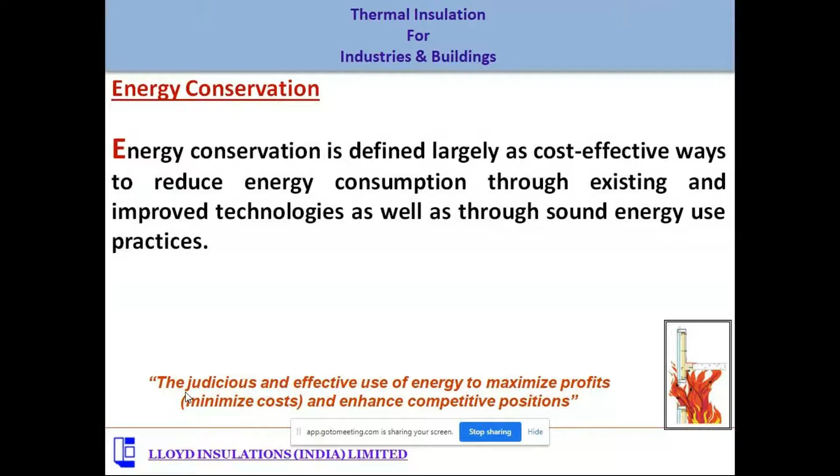In this presentation, you will understand the basic working principle of thermal insulation, how it acts as a barrier for energy conservation and energy transfer, and what applications and materials are available in the market. What are the good materials suitable for industries? I will discuss these things from a practical implication point of view. It will be a little bit theoretical, but mostly focused on the application part.

It has been observed that thermal insulation is one of the cheapest and easiest methods of energy conservation for any heating or cooling arrangement. This is a very simple, very cheap material, and with it we can get very efficient, energy efficient management through implementation of thermal insulation material.

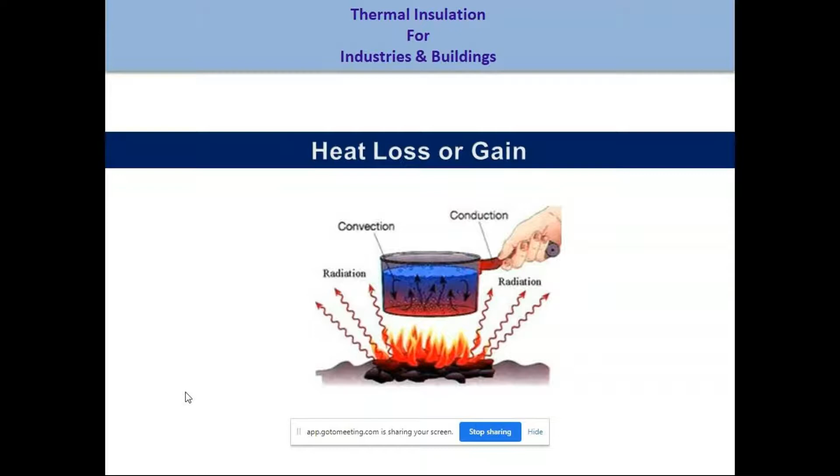The simple basic heat transfer methods are there, which everybody has studied in school, probably 10th or 11th standard. Heat loss or heat gain depends on three different kinds of heat transformation: convection, radiation, and conduction. These three methods take place when there is a difference in temperature between two surfaces or two mediums, where heat transfer takes place from the hotter to the colder object. That's a very simple and common thing everybody knows.

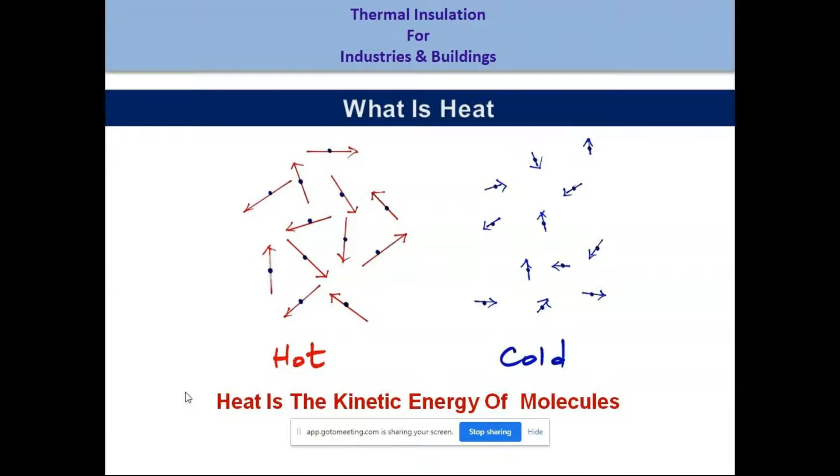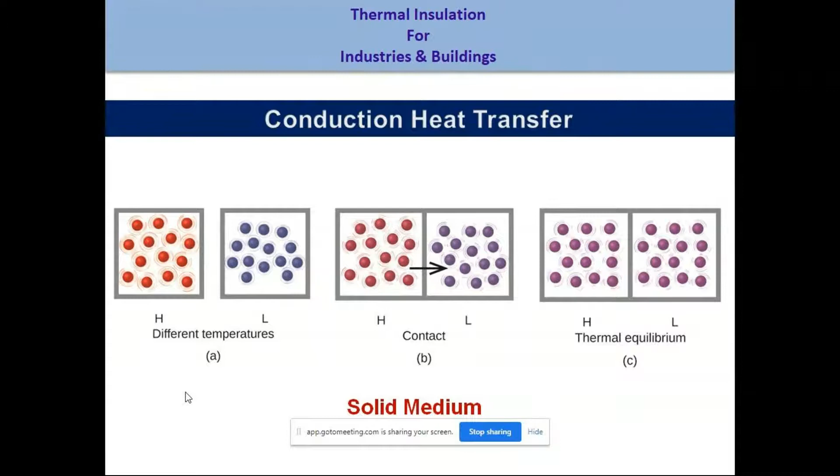In the case of conduction, there has to be contact between two surfaces, with a solid medium involved. When we talk about conduction heat transfer, there will be two solid mediums in contact, one with higher temperature and one with comparatively lower temperature. Heat will transfer from one solid body to another by conduction, and after a certain transformation of heat, it will come to equilibrium, meaning both bodies will reach the same temperature. That is called conduction heat transfer.

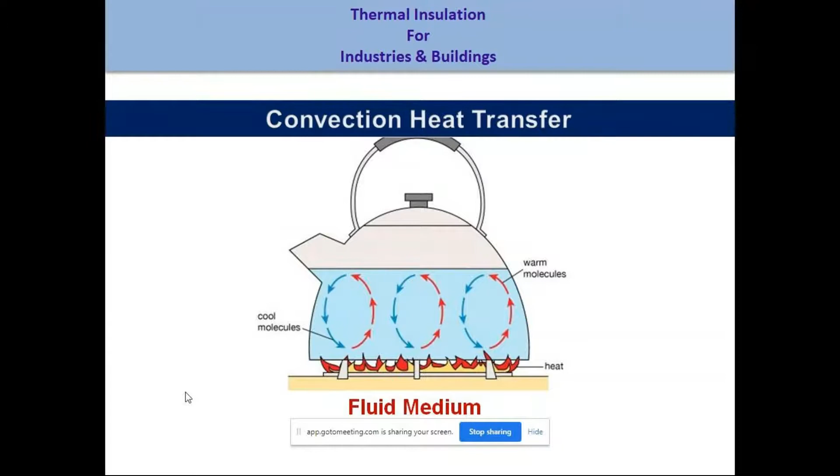Then there is convection heat transfer. For convection, we need a fluid medium—it may be air or any liquid. Within a liquid or fluid material, convection of heat takes place in a circular motion, or from bottom to top, something like that. It happens in air and in any fluid medium. That is called the convection heat transfer system.

Then there is radiation heat transfer—a kind of heat transfer that doesn't require any medium. There should not be any fluid or solid medium; without any medium, when heat transfers, we call that radiation heat transfer. For example, when we get solar heat, there's no medium between Earth and Sun, but the solar radiation still comes to Earth. That is called radiation heat transfer. So heat transfer can happen in these three different forms. But when we talk about radiation heat transfer, we need to understand a bit more about it.

What is radiation heat transfer actually? Radiation heat is basically transferred in the infrared spectrum, which is part of the electromagnetic wave spectrum. There is a small portion called the visible light spectrum, which the human eye can sense, starting from violet to red. Beyond violet there is ultraviolet, which we cannot sense, and beyond red there is infrared, which the human eye also cannot sense. The heat transfer takes place in this infrared region, which is not detectable by the naked eye.

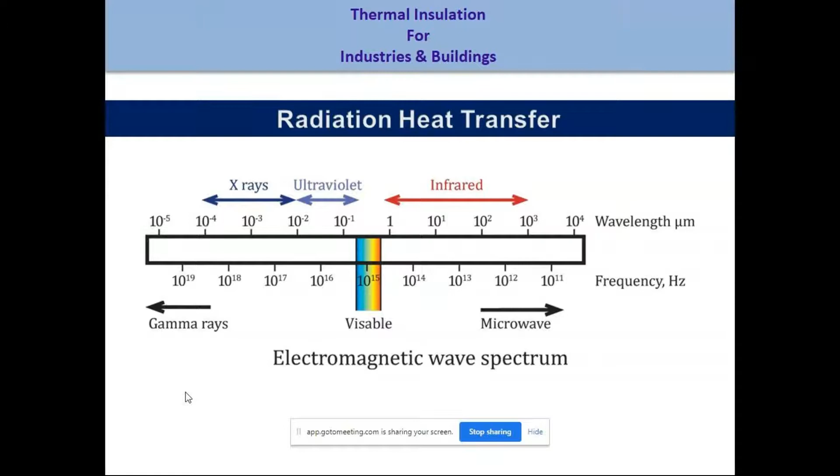For that, we need a kind of sensing camera, or infrared temperature sensors, which are now very common and popular. Everybody can see there is a lot of thermal scanning happening at airports and in every office and everywhere—security persons using a camera or a temperature gun to measure the temperature of a patient or any human being.

This is a very good tool for us to estimate or find out any difficulties or faults in any equipment or measuring system, like building insulation or industrial applications like boiler leakage or pipeline leakage. Everything can be detected by using these infrared cameras.

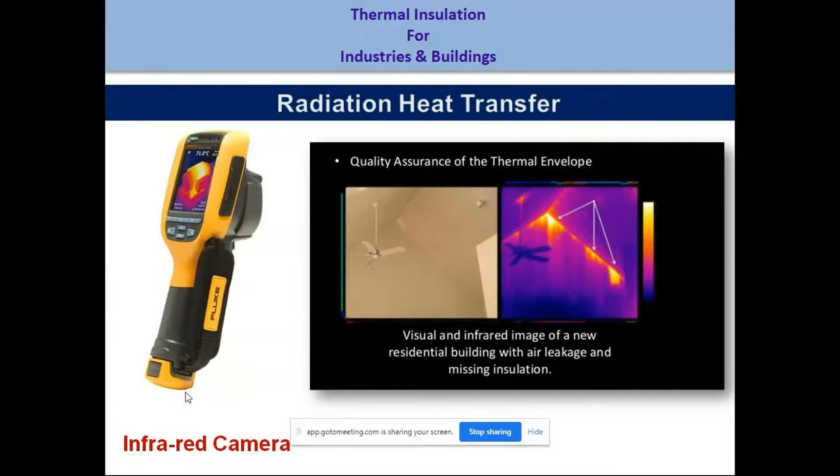The same technology is used for night vision cameras. When we talk about night vision cameras, that camera senses the temperature differences of the object or any human being. So even in pitch dark, when there is no light, a night vision camera still works, because it doesn't sense any light—it senses only the temperature gradients or temperature differences in the environment. So these infrared cameras are a very common tool for measuring the temperature of an object.

Right? Now the simple thing is, what are the basic formulas or calculation methods of heat transfer?

K is the thermal conductivity of the barrier. This is the most important characteristic or property of any thermal insulation material. Based on the K value, the performance of any insulation material should be judged. So whenever we select any product for insulation purpose, the basic requirement is to take care of the thermal conductivity value, because based on that we can calculate what thickness is required to achieve a certain level of heat loss or heat transfer.

So K value is the thermal conductivity value, measured in kcal, or it can be in watt per meter Kelvin. There are different kinds of units for K value or thermal conductivity value.

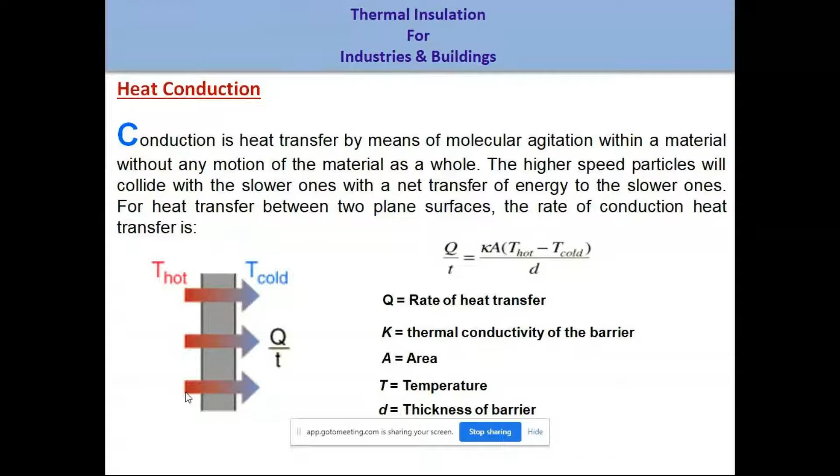In this formula, we have only considered the conduction heat loss. K value is basically for a solid medium, the thermal insulation material, and whatever heat gets transferred through that insulation is conduction heat transfer. But as we know, there are two other forms: radiation and convection. We were not considering those two factors in the previous formula. Now we are going to implicate these two factors again. So what will be the final formula?

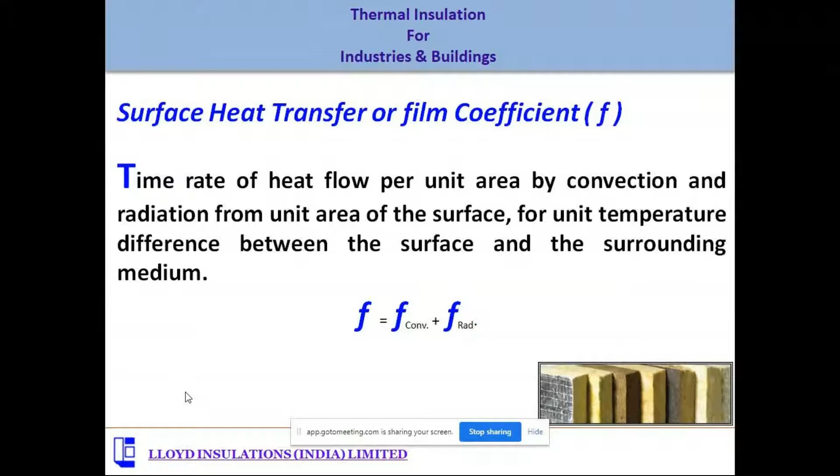Let me explain this. If we consider there is heat at the bottom, that means there is a hot surface or hot body. Over that we put insulation, and above the insulation there is a cladding or covering. Every insulation material should be covered with some sort of solid or protective material, called the insulation cladding. I will explain what cladding materials are available later.

Whenever heat from the hot body transfers to the insulation material, that's conduction heat loss. The quantity of heat coming out through the insulation exists because insulation doesn't mean we are 100% protecting against heat transfer. There is always some heat transfer depending on the thermal K value or thermal conductivity of the insulation material, so some heat will come out through the insulation at the top, at the cladding material covering the insulation.

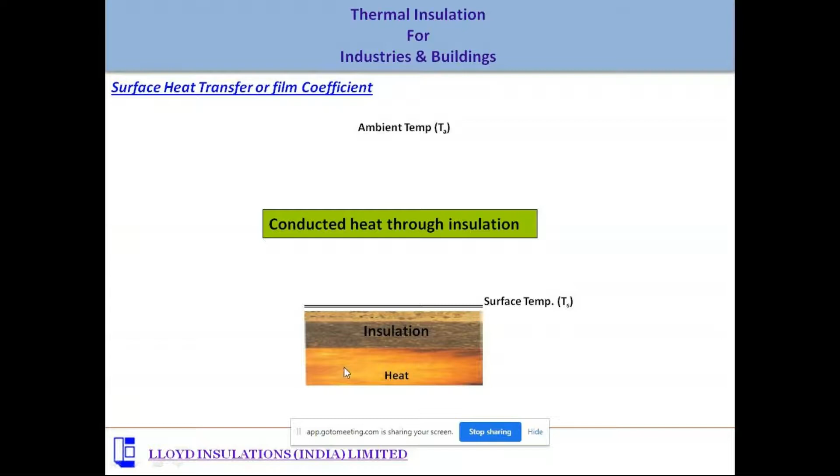From the insulation surface, heat loss actually happens through radiation heat loss and convective heat loss. On the surface of the cladding material, due to wind velocity, convection heat loss occurs. From the surface, due to wind, some heat dissipates into the environment - that is the loss. The quantity of heat dissipated into the environment because of wind velocity is the same quantity that will again come from the hot body to the surface of the insulation.

Similarly, there will be some heat loss due to the radiation effect on the surface of the cladding material. There, the surface emissivity factor refers to the texture or glossiness of the surface. The glossier the surface, the less the radiation heat loss. So you'll notice that whenever there is insulation, there is a covering material called glossy aluminum sheet. We always try to use glossy materials on the insulation surface to reduce the emissivity factor so that radiation heat loss is reduced.

We wrap food items with aluminum foil just to keep them warm longer, because the aluminum foil has a glossy surface, and since it's glossy, its emissivity is very low, so it radiates less heat into the environment. So the product remains hot for a longer time. That is the idea of using a glossy surface on the insulation.

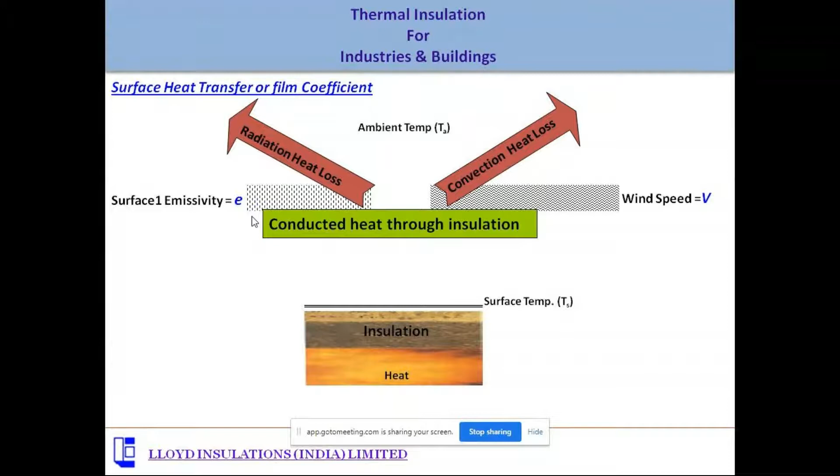I am referring you to the IS factors - this is the formula. Now you can see the final heat transfer coefficient considers F, which includes the radiation factor and the velocity of wind factor. There is an E factor, the emissivity value of the particular cladding material, and V for the wind velocity, considering the ambient wind condition. The other factors, like 4.876 times 10 to the power minus 8, are all constant figures derived from actual experimental data. These have been formulated to calculate the heat loss, based on experimental data from which these constant figures came.

They have given us guidelines, like for bright aluminum sheet, what should be the factor of emissivity, and for GI sheet, what will be the emissivity factor. In cases where people use cement plaster as a cladding material over the insulation, these are the factors, and you can see the brighter the surface, the lesser the heat loss. What per meter square Kelvin is the heat loss from the surface, or the heat transfer coefficient from the surface - the brighter aluminum has the lesser value of heat transfer coefficient, meaning it will allow less heat to transfer from the hot body to the ambient.

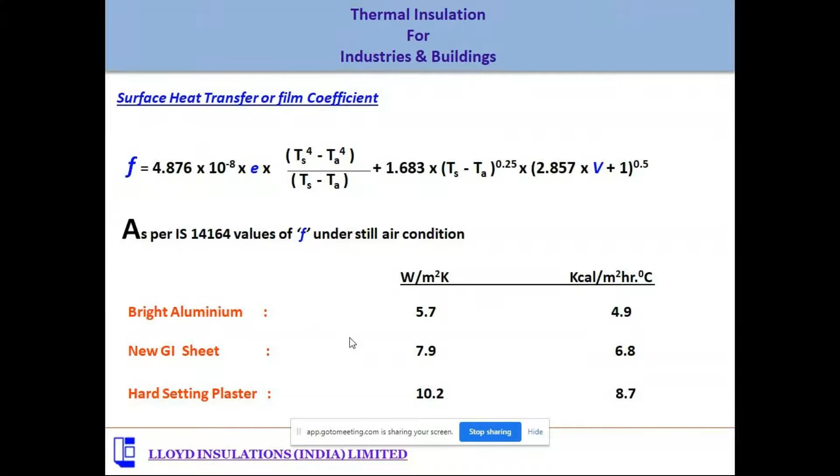There is another important thing - this is the film coefficient calculation method. What are the factors and formulas we use for the film coefficient or surface heat transfer coefficient calculation? This is the modified formula of heat transfer, considering the F factor, or surface heat transfer coefficient factor. Here we are putting the F value to calculate the actual heat transfer coefficient.

Now there is an interesting thing, that for a flat surface we are using one formula, and for a cylindrical or pipe surface we are using a different formula, where there is a logarithmic factor involved.

The reason behind this is, whenever we are putting insulation on a flat surface, as I told earlier, the heat loss or heat gain is directly proportional to the surface area of the insulation. So in case of a flat surface, if we consider 1 square meter of flat surface and put insulation on top, the exposed surface area is also 1 square meter.

But in case of a pipe, if we consider the surface area for a particular diameter pipe, once we put insulation on top with a thickness of say 100mm, the overall surface area of the insulation material will be much higher compared to the bare pipe surface area. So to compensate for that, this logarithmic factor has to be implicated in the formula. That's why there are two different formulas - one for flat surface and one for cylindrical surface - when we calculate for any particular system.

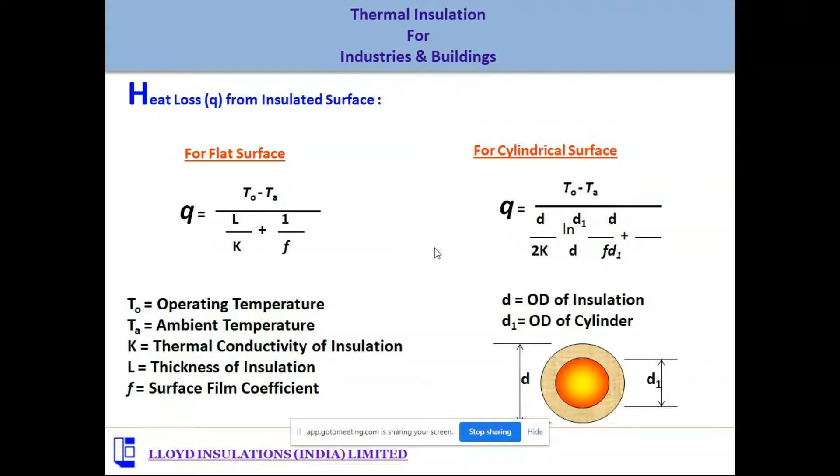Now a very common question comes to us - what should be the economic thickness of insulation? If we keep on increasing the insulation thickness, it is obvious, a very common assumption, that at a certain point there will be no heat loss. The more the thickness of insulation, the lesser the heat loss or heat gain. So if we keep on increasing, at one point there should be a certain condition where there is no heat loss, and everybody will try to adopt that thickness to minimize the heat loss and financial losses.

But it is not that - actually what happens, I'm telling you. Whenever we increase the thickness of insulation, we are increasing the surface area as well. In case of a flat surface also, when we consider the insulation surface, there is also the periphery surface. If I use a 1 square meter insulation of 50mm thick, then that 50mm thick surface area is also there, from where heat loss will also take place. So if I keep on increasing the thickness, that area also increases.

So this graph will nicely explain what should be the optimum thickness for any heat loss or heat gain calculation. If we see the insulation thickness in the x direction as increasing, and y as the heat loss quantity, then when we increase the insulation thickness, this red line shows the cost of heat loss. As I'm increasing the insulation thickness, the cost of heat loss is drastically reducing, but after a certain point, even if I keep increasing the thickness, you can see this red line...

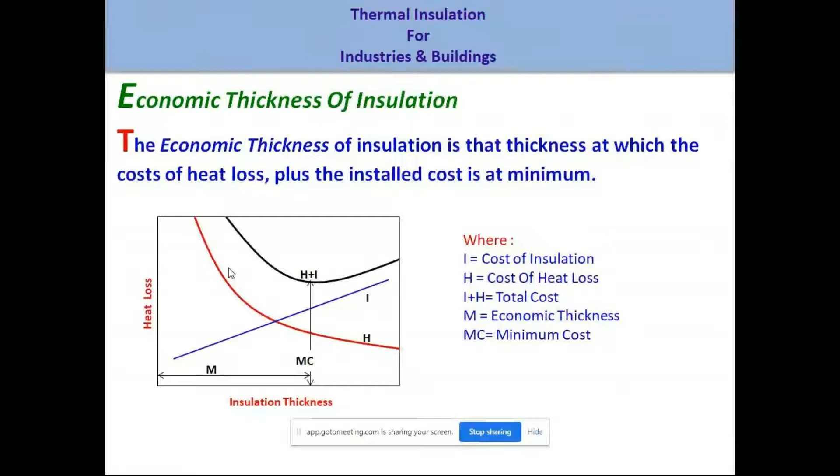Then another factor comes in: insulation material selection. There are different kinds of insulation materials available in the market. While selecting the insulation material, what should be the deciding factors? Since different materials have different properties, what are the basic important properties we have to be careful about when selecting insulation material?

First of all, whether those materials follow any particular standard, whether it's an Indian standard, American standard, or British standard, because these standards are very stringent in designing the material properties. So when any insulation material conforms to a particular standard, that gives a quality certificate. This is the basic, foremost criteria for selecting any insulation material.

Then the operating temperature range - whether that particular material or insulation is suitable for the temperature where I'm going to use it. For example, if I'm using a material at 1000 degrees centigrade but its withstand temperature is only up to 500 degrees centigrade, it will not perform well at that temperature. So we have to be careful that the operating temperature of the system and the withstand temperature of the insulation material are checked.

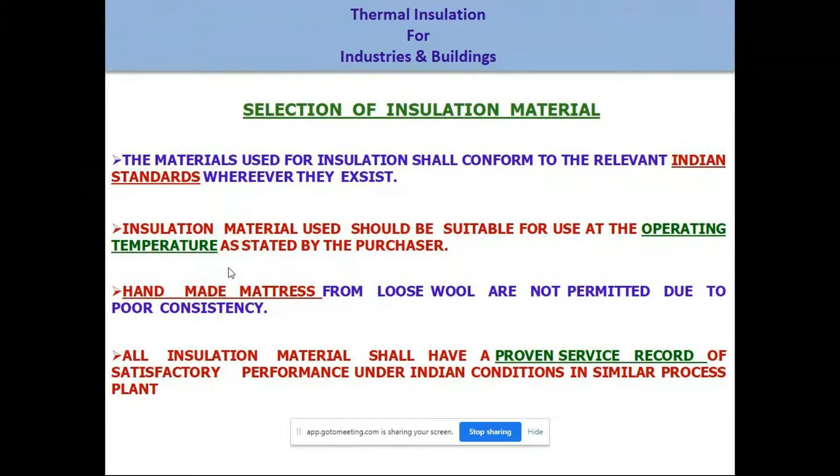Then other important factors are like water repellent grade, because whenever we use an insulation material on a pipe or metal surface, if the material is not water repellent or waterproof grade, and it absorbs moisture or water, it will corrode the base material, I mean corrode the pipe or metal surface. So we have to be careful about selecting material that is water repellent or water resistant grade.

Whether it is corrosion resistant is also important, because in big industries like power plants and refineries, there are huge pipelines or boiler areas. If those materials get corroded, there will be huge loss, and there may even be accidents due to leakage of steam and similar issues. So corrosion resistant materials are very important.

Then comes whether it is fireproof or non-combustible type material. When we talk about combustibility, there is a combustible test method. For example, if we burn a paper, that paper will start flaming. Now, if you put that paper in a container and allow the fume to come out through a particular hole...

When the paper is burning, there will be some fume, and that fume will come out from the container at the top. If we try to put a fire to that fume and it gets ignited, that means it is a combustible material. But if the fume doesn't get fired, that is a non-combustible material. So non-combustible and non-ignition are two different things.

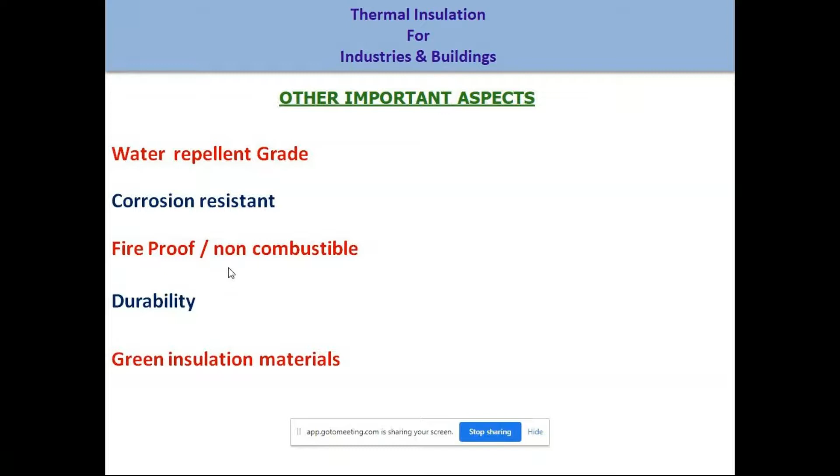But now IGBC or GRIHA, these green building rating systems, actually recommend the products which are green products or not. There are green certifications from GRIHA for different kinds of insulation materials. So there are different types of insulation materials available in the market. I will go through the basic and most common insulation materials available, which are widely used, so that you can understand the facts required for this insulation system.

This is the most common and widely used insulation material, the cheapest insulation material. Throughout the world, this material is being used. That is known as rock wool insulation. Rock wool, as the word suggests, is made out of rock. It's called basaltic rock or volcanic rock.

From the volcanic rock, by melting the volcanic rocks at around 1800 degrees centigrade, from the molten rocks we get fibers. We get very thin fibers out of that rock, and bonding those fibers with some sort of resin called phenol formaldehyde resin, used as a binder to bind the rock fibers, we get a different form. You can see this picture.

So this is basically a slab form. This is a slab form thermal insulation product, and it can withstand up to 750 degrees centigrade continuous exposure. So wherever there is a system, maybe a boiler or steam line, this is the most common and the only product available in the world for widely applied things.

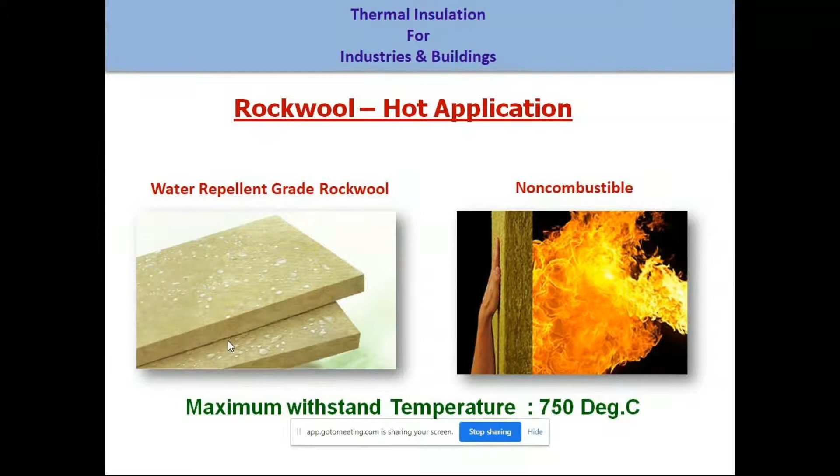There are other products for high temperature applications beyond 750 degrees centigrade. This rock wool insulation comes in different forms, like this one for pipe insulation - preformed pipe insulations are there, so it can be readily applied on the pipe.

They are in the mattress form also. This rigid slab is actually used for any flat surfaces. And if there is any curved surface, then this kind of mattress or roll form insulation is used. So this is basically used for hot insulation up to 700 degrees centigrade, or it can go up to 800 degrees centigrade also. For hot applications, we use these rock wool insulations, and widely for all steam lines and boilers, these insulation materials are used.

Beyond 800 degrees centigrade, within 800 to 1425 degrees centigrade maximum, there is another product called ceramic fiber. The ceramic fiber is made out of aluminum oxide - not silicate, aluminum oxide. Silicate is a little bit mixed in there. Al2O3 is the basic material. So same thing - out of that Al2O3, from the molten aluminum oxide, we extract fibers, and then with a suitable binder, we make it into a different format.

You can see there is a slab form, again the mattress form. So there are different kinds of forms available for ceramic fiber. These are mostly used for furnace lining, wherever there is temperature more than 1000 degrees centigrade, varying between 1000 to 1400 degrees centigrade. Within this temperature range, this ceramic fiber insulation is the most used insulation.

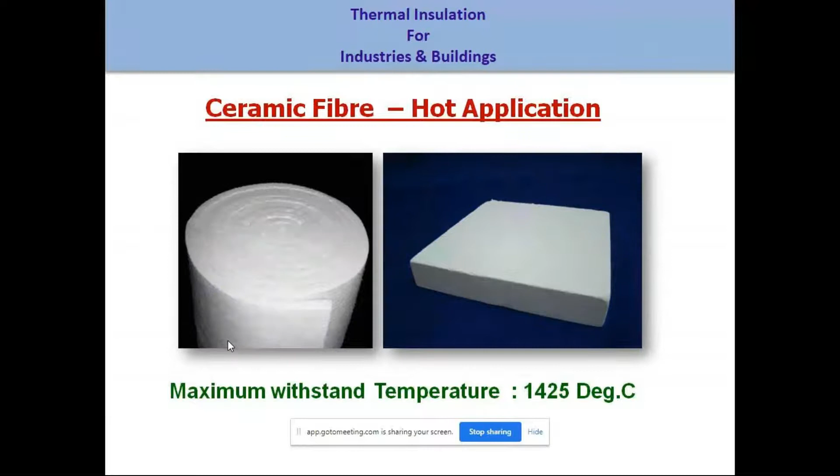It comes in different forms, and you can see again there is a module form, a paper form, a thick sheet form. So there are different forms for different kinds of modules, like with blankets or with slabs in different layers.

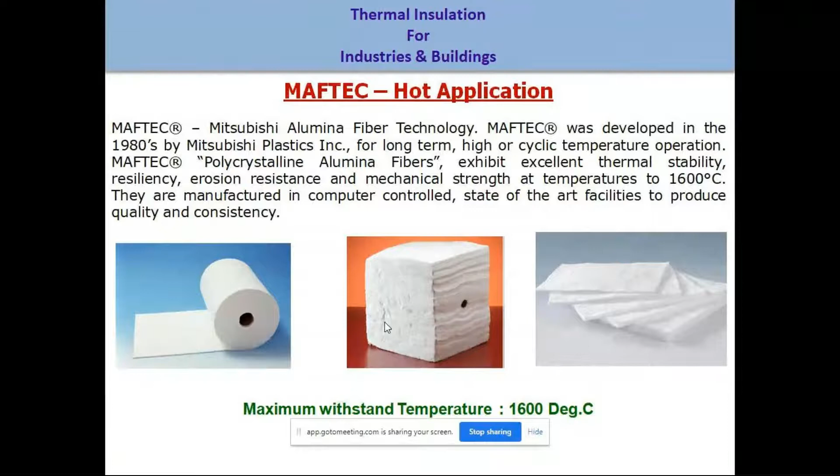In case of say 1400 degrees centigrade temperature, the thickness of insulation or ceramic fiber goes around 300 millimeter or maybe beyond that. So with that, we manufacture this kind of 300 mm ceramic blocks to use inside the furnace lining.

I'm just showing some pictures of ceramic fiber lining inside a furnace. These are all gas-fired furnaces. You can see at the bottom there are some holes. From these holes, gas-fired burners are there, and the fire comes inside these holes.

The insulation material maintains the temperature inside, and the outside surface temperature should not go beyond 60 degrees centigrade, even when the inside temperature is more than 1400 degrees centigrade. The outside of the insulation or boiler casing maintains around 60 degrees centigrade, because more than that is not allowed from a personal protection point of view — beyond 60 degrees centigrade our skin may get damaged. The guideline says any heated object surface temperature should not be more than 60 degrees centigrade, so the thickness has to be designed such that the outside surface temperature of the insulation stays below that.

So these are some applications I'm showing you for furnace lining with ceramic fiber type of insulation application.

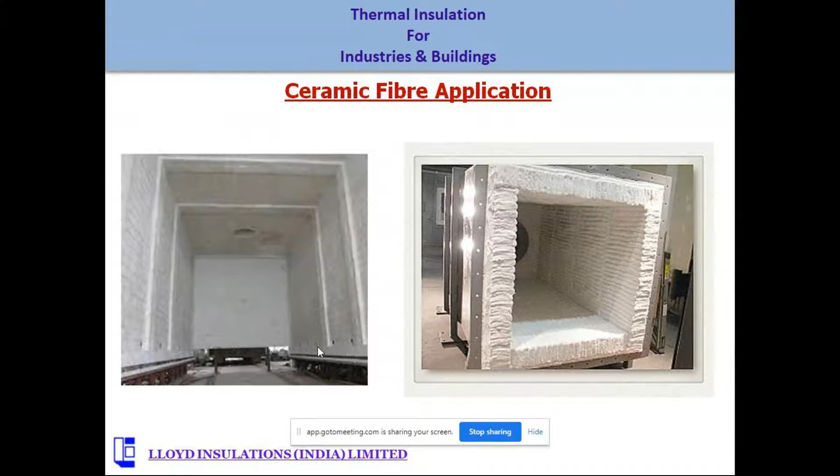Whenever we consider cold applications, there are always chances of condensation. Whenever we use cold water or ice in a glass or any container, you will find condensation on the outer surface. The same thing happens when we use insulation on any cold application.

It may be chilled water pipelines or cryogenic lines where the temperature goes down to minus 200 degrees centigrade. There, if insulation is not proper, chances of water or moisture condensation on the surface are very common. If we use fibrous material there, it is almost certain the moisture or condensed water will percolate inside the insulation and reach the insulated surface, corroding the metal pipe or surface.

So to avoid that, there is a main insulation material called PUF, polyurethane foam insulation.

I will show you how polyurethane foam actually forms. It becomes foam when two component liquids come in contact with air and start foaming — that's why it's known as foam, polyurethane foam. Polyol and isocyanate are the two chemicals; when combined in presence of air, they start foaming. That's how the manufacturing process of this PUF insulation is done.

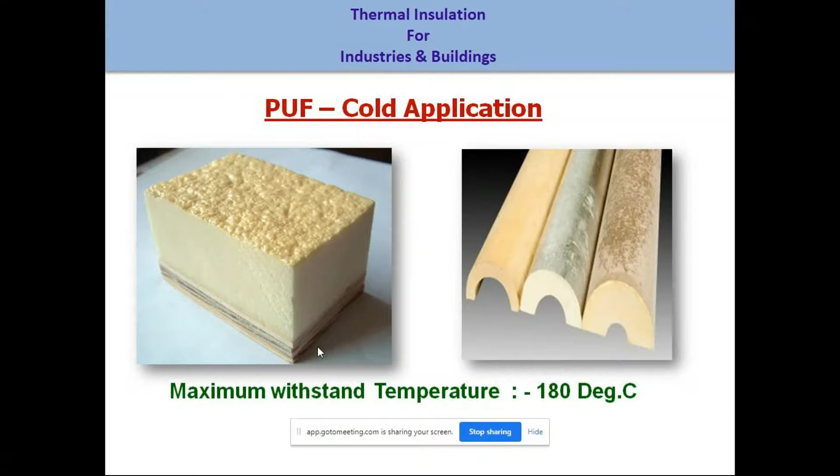To avoid any chances of water ingress through the insulation material, we always prefer to add a vapor barrier or moisture barrier between the insulation and the cladding material. Every insulation material has to be covered with a cladding or covering material to protect it from mechanical damage. As I said, a brighter sheet has a lesser emissivity factor, so we always prefer a bright aluminum sheet as the cladding material for insulation products. That is why we use aluminum sheet.

In case of cold insulation, we add an additional layer of vapor barrier — it may be a rubberized sheet or aluminum foil, which acts as a very good vapor barrier. This ensures that if any moisture forms on the surface of the cladding material, it will not reach the insulation surface. To avoid that, we always use a vapor barrier in cold applications.

This is the latest insulation product developed, not so popular till date because of high cost. This is known as microporous insulation, having a wide range of operating temperatures from minus 200 degrees centigrade to 1000 degrees centigrade. So whenever we discuss different products for different temperatures, like rock wool, ceramic wool, PUF, microporous insulation can act in a wide range of temperatures. At the same time, the thermal conductivity value is almost one-tenth compared to ceramic fiber, rock wool, or PUF insulation. So it is a very high efficient insulation product. If I need 100 mm thickness of rock wool for any insulation system, microporous will require only 10 mm thickness. So you can understand the impact of the insulation.

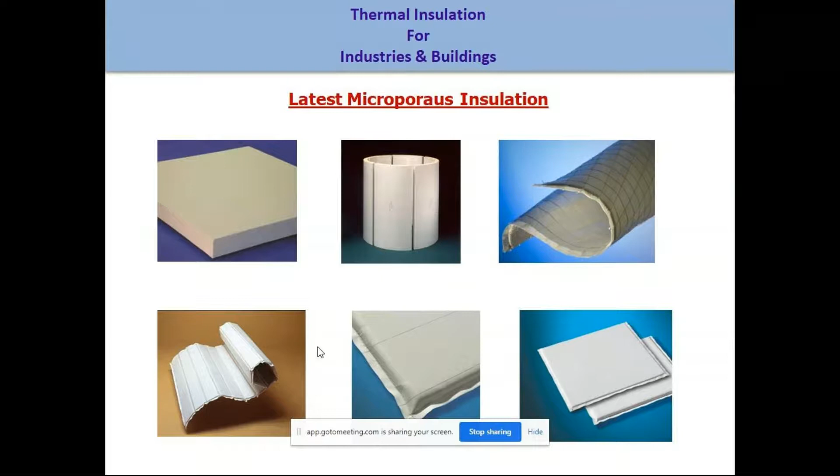Thank you. So this microporous insulation may be a future insulation because of its very low conductivity value and flexibility in terms of wide range of temperature applications. So in future, probably this will be the ideal product for any kind of insulation. Presently, there is no manufacturer in India, but we're importing this product from Germany. So this is a very efficient product, but hopefully the cost will come down in time.

As well, the cladding material is also very important for any insulation material, because the life of insulation material depends on the cladding or covering material. The most popular cladding material is aluminum sheet. The reason behind this is its glossiness is good compared to GI materials, though GI is comparatively less costly than aluminum sheet. But from the heat loss point of view and longevity point of view, aluminum sheet is the most popular cladding material for any kind of insulation system. If you visit any refinery, petrochemical or power plant, you will find huge pipelines with insulation, and all the pipelines are covered with aluminum sheets. So this is the most common cladding material for insulation.

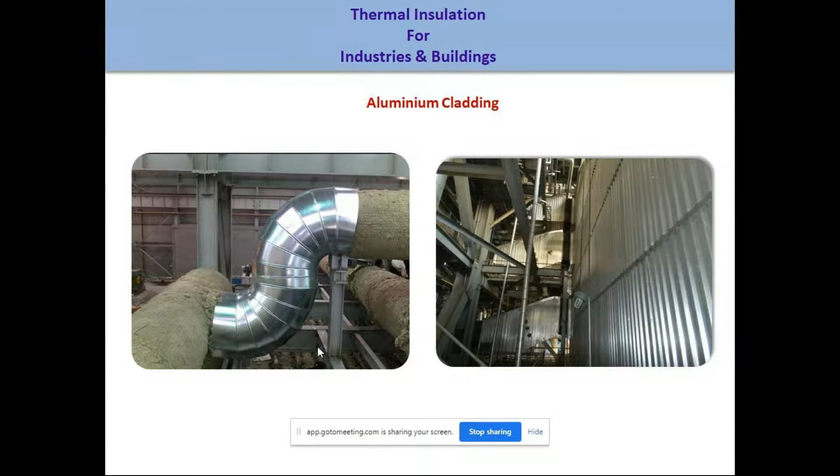There are different kinds of color-coated sheets. GI sheets are also coming into the picture because of their aesthetics as well as strength. In case of aluminum, the problem is the mechanical strength is not much compared to GI sheets, but the life of aluminum sheet is much better in terms of corrosion. If we use color-coated GI sheets, that will add a stronger sheet compared to aluminum sheet, and because of its color coating, it will give extended life compared to normal GI sheet. But we are compromising the emissivity factor, so there will be some extra heat loss from that. So there is an economics of using this kind of sheet where it is required.

This is mostly in cases where the pipelines are at ground level, where there are chances of foot traffic. In many industries, people used to walk on the pipelines because maybe there are 2-3 pipelines going together. One pipeline is a plain water pipeline where it needs to be painted regularly, so people step on the insulated pipe and walk to paint the uninsulated pipe. The chances of damage are there. In those cases, aluminum sheet will not be suitable because it cannot take human foot traffic load. So it's better to go for GI color-coated sheet in that particular case.

There are some cases where the pipeline goes below the trench, through the trench or below the earth surface. There, neither aluminum sheet nor color-coated sheet will work. There we use HDPE cladding, high-density polyethylene sheets, which are good cladding material for underground piping. In many plants, you have seen chilled water pipelines for HVAC systems are underground pipelines, where normal insulated sheet with aluminum sheet will not work. So there, these HDPE cladding sheets are used. These are a totally waterproof system. In case of aluminum or GI sheet, there will be overlaps, joints, screw fixing, so chances of water seepage will always be there. But these HDPE sheets are hot welded - once I wrap the insulation, we just use a blowtorch to seal the joints, giving a 100% waterproof sealing system to ensure there is no water ingress into the insulation.

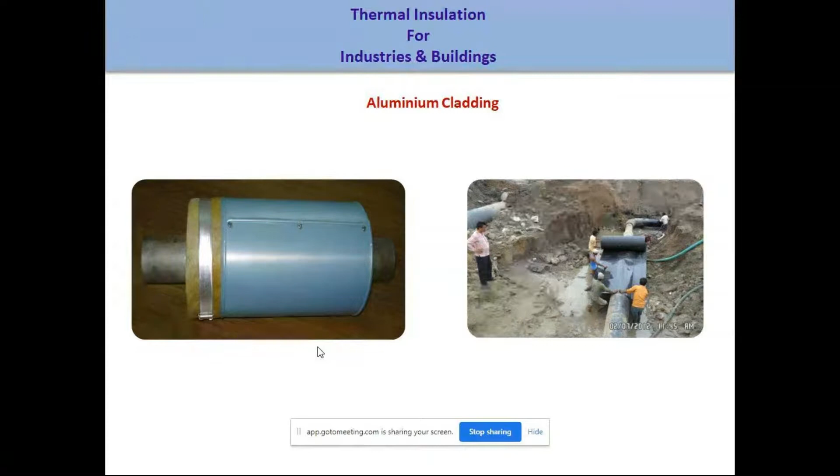So for underground pipelines, there are these HDPE cladding sheets.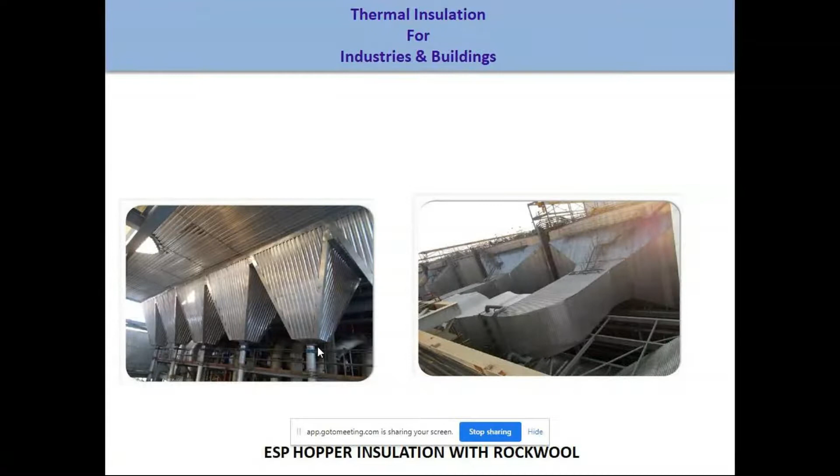In industrial applications, if you visit any plant wherever there is some sort of heating instrument, like a furnace or a boiler, particularly in a refinery, you will find boilers, furnaces, and heaters. Insulation is everywhere there, and all over the insulation you will find this kind of aluminum sheets. Those who are not aware about insulation will not understand what is actually inside that material. But in power plants, refineries, and petrochemicals, there is massive use of thermal insulation.

These are some pictures you'll see. I was just showing the people who are working. You can see they're using a heat shield while working on the live lines. These pipelines are almost always operating.

Operating at around 540 or 550 degrees centigrade in case of a power plant, the superheated steam temperature goes up to 540 degrees Celsius. So at this temperature, in a running plant when we are working, people wear this kind of protection shield to work on the live lines. In many cases, when maintenance work goes on, they cannot take a shutdown for the plant, so we have to work on live lines. That is a very difficult job for installation work at that high elevated temperature.

So there are some preformed, tailor-made insulation systems for valves and flanges. In any pipeline system, the valves and flanges are kept open, with no insulation formed. This is a very common practice in any industry.

So to minimize heat loss, because in a big plant, if there are say 100 such valves, the quantity of heat loss from those valves or flanges is quite high, tailor-made systems have been developed to minimize the heat loss from open valves.

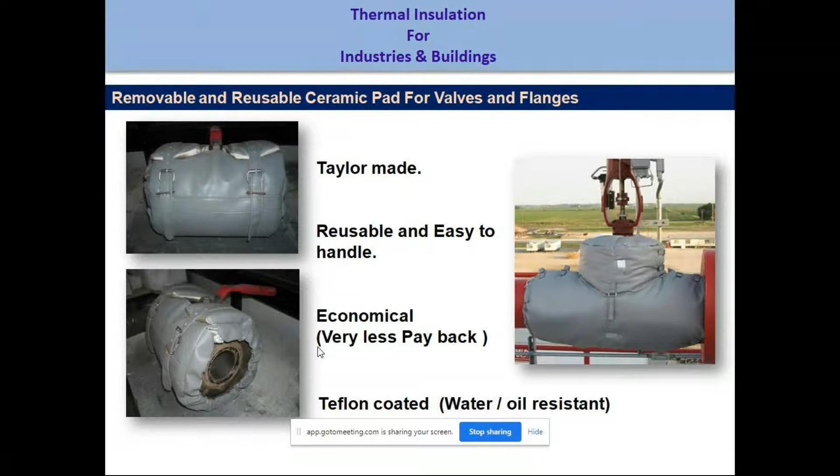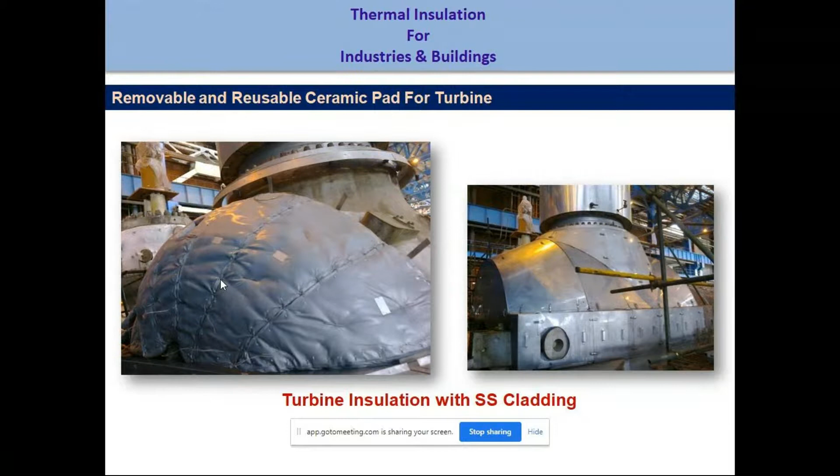But now developments are taking place. Pre-insulated slabs or pre-insulated pads are nicely stitched over the surface, and can follow the surface of the turbine properly. So these are the developments now taking place in different industries, so that the ease of application is becoming more and more, compared to the previous type of applications.

These panels are made out of puff or PIR. PIR is a superior quality of puff. Polyurethane foam is more commonly known as puff material, which is not fire safe in that way. So there is a small change in chemical known as PIR, polyisocyanurate foam, which has better fire performance. So in building applications, when we are using HVAC ducts, we should not be allowed to use any material which is a fire hazard.

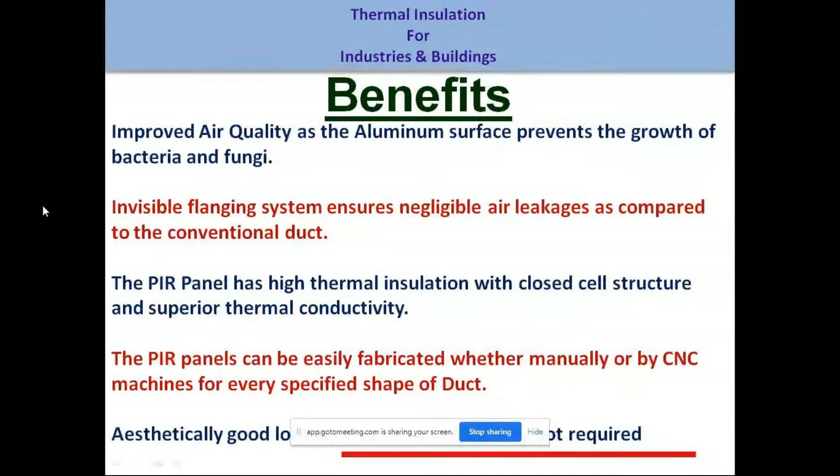And of course, the aesthetic part of these ducts is quite good compared to the conventional GI duct system. You can see the finishing of the ducts is very neat, and it can be an exposed ducting system so that you don't require any false ceiling to hide the ducts. So since the ducting aesthetic is good, people now use these ducts as an open duct system instead of going for any false ceiling.

That again reduces the cost of the system, and it is so lightweight that you don't need extra workers or labor to put the ducts on the building surface. So the advantages compared to the conventional system are quite high.

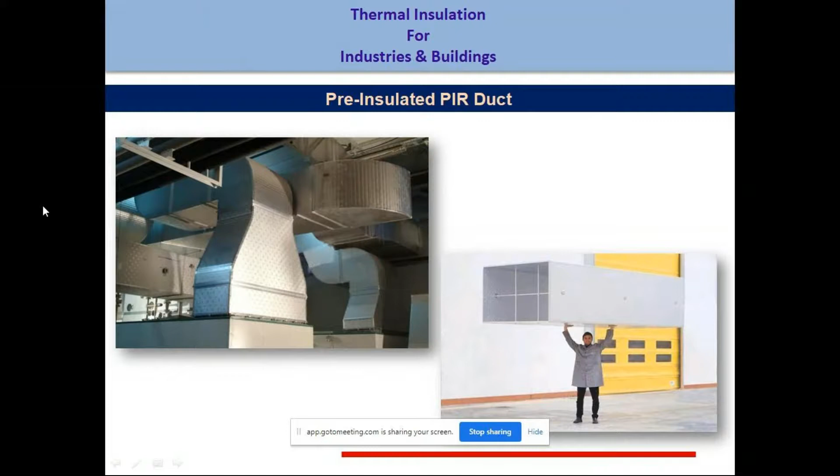So these were mostly talking about the industrial sector, but obviously in the building sector also. Now I'm coming to the building applications, because nowadays building insulation is becoming popular very rapidly. In tropical countries like us, we are not as familiar with building insulation compared to cold countries.

If we follow the building codes in cold countries, it is mandatory to use insulation for buildings, because the heating arrangement needs to be very energy efficient, and without insulated buildings they cannot sustain because the heating cost will be abnormally high. So it is very common in cold countries that buildings are insulated. But here in this tropical country, this concept is not that popular.

But now a lot of guidelines are coming, because energy savings and energy conservation systems are becoming popular as electricity costs rise. So we need to adapt this insulation for buildings.

Let me share a few things. If we consider old buildings, if we see the British structures, there are a lot of such buildings in Kolkata. The wall thicknesses are quite high, the roof heights are also quite high. Because of that, even without insulation, the inside temperature is quite comfortable compared to present day constructed buildings, right?

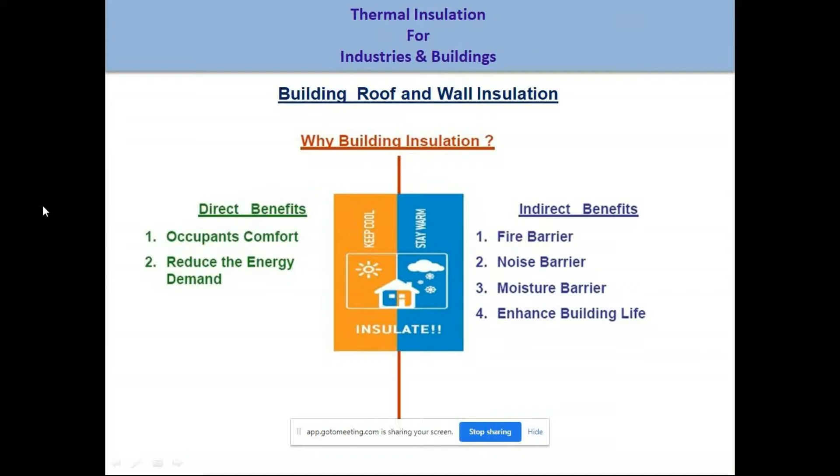In case of building insulation, it is not only helping us in the hot days, saving our electricity bill from air conditioning, but in the winter also it is helping us in a different way.

Like the solar radiation, if you can see in the summer, the path of the sun is such that it goes almost from the vertical portion of the top of the building or top of our head, so the direct solar radiation comes on the rooftop. But similarly, in the winter, the solar radiation or the solar incidence is coming at a certain angle. If you have noticed, the solar radiation in the winter comes through our windows, because the orientation of the sun is such that the angle of incidence is quite less. So the solar radiation actually comes through our windows, and it gets heated inside the building.

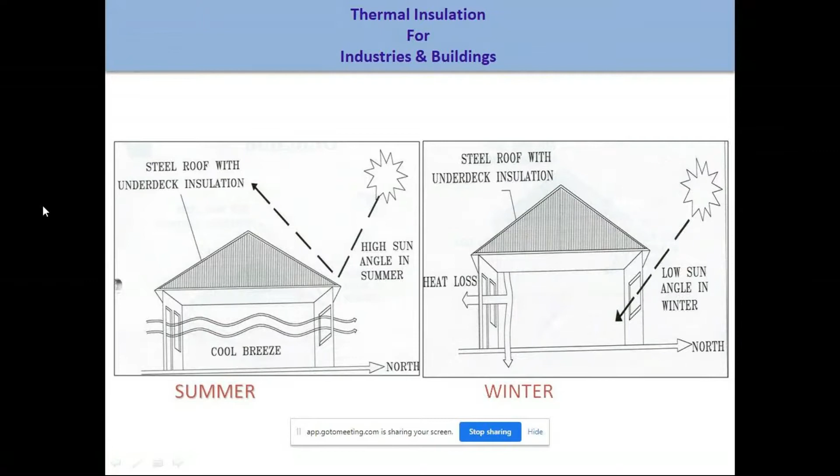So because in winter, when we are getting the solar radiation inside the building, the room or inside the room is getting heated, and that heat will remain for a longer time if insulation is there. So in the winter also we are getting benefited, and at the same time, in the summer also we are getting benefited out of this insulation on the building.

So to guide us on what will be the ideal insulation system, what should be the thicknesses, etc., there has been a code generated in the year 2007 called ECBC 2007. There have been a lot of workshops and seminars organized by ISHRAE on this topic. A lot of modifications later came in this ECBC system, and the latest ECBC, I think in 2018, has been developed, and different states are modifying this code depending on their requirements.

So state-wise ECBC codes are also different. This code actually guides us on what should be done, not only insulation, there are a lot of other aspects also there, in case of glass glazings, in case of water harvesting, whatever the energy efficient building practice should be, that has been guided in this code. Insulation is one part of that.

Whenever we are going for insulated building or energy efficient building, there is now a rating system of the building also, like star rating. In case of electrical appliances, we go for a star rating system. A similar rating system is also applicable in the building sector. So to achieve a gold rated building or a platinum rated building, there's a certain number of points to achieve, out of 100, if we can achieve 90, then we can go for gold certification, something like that.

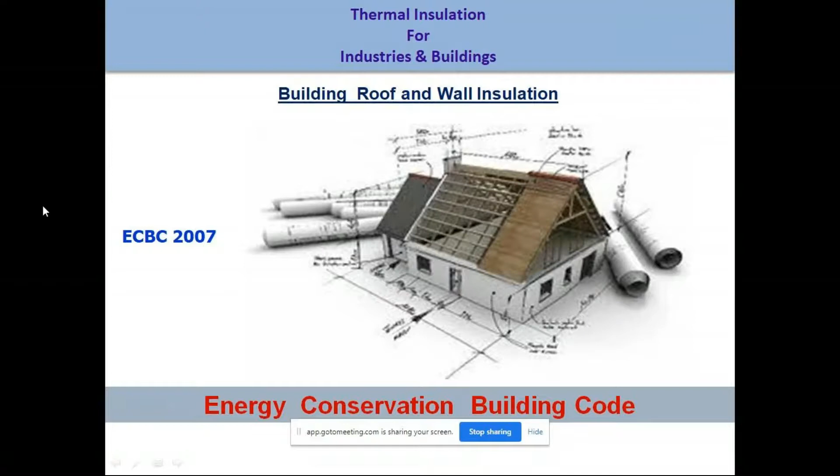There are almost 34 different points, starting from water harvesting, solar lighting system, gardening, tree plantations, thermal insulation applications. So there are different points, and based on those points, how much one building is scoring, depending on that, that building will be rated. Insulation marks are 9 points out of 100, so it carries a good amount of points if we use insulation in building construction. So whenever people think about certification of their building, insulation can carry a lot of marks to achieve a certain rating of the building.

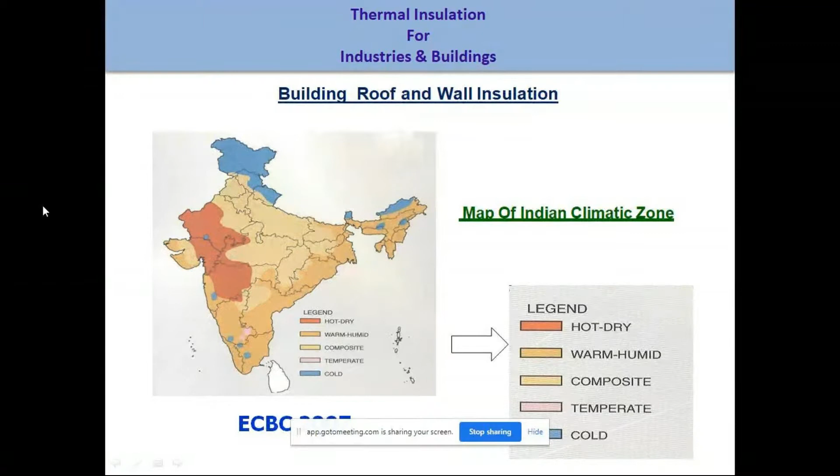This ECBC code has divided the entire country into 5 different climatic zones: hot and dry, warm and humid, composite, temperate and cold. So these 5 climatic zones cover the entire Indian contour, and based on these different climatic zones, they have guided us with different kinds of U value or R value.

I'm just telling what is the U value and R value. There are 2 kinds of buildings. One is 24-hour use building, that is hospitals, call centers, hotels. And there are some 12-hour use buildings like offices, schools, shopping malls. These kinds of buildings are considered as 12-hour use buildings.

So for 12-hour use buildings and 24-hour use buildings, ECBC has guided us for different climatic zones what should be the U value or R value of the walls and roofs. U value means thermal transmittance factor and R is thermal resistance factor. It's just the inverse. R is equal to 1 by U, or U is equal to 1 by R, whatever it is. So if we know the R value, we can calculate the U value as well.

R is L by K. L is the thickness of the insulation and K is the thermal conductivity. Whenever we talk about the thermal resistance of any particular insulation, we calculate it as L by K, thermal insulation thickness divided by the K value of that particular thermal insulation. So what is the thermal resistance we have to achieve for a particular building, for a particular composite area? That has been guided, and these figures we can get from the ECBC 2017, now it has been modified.

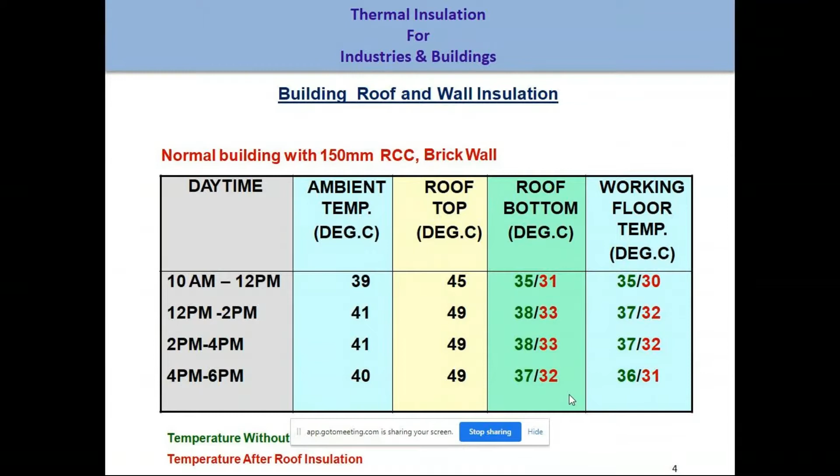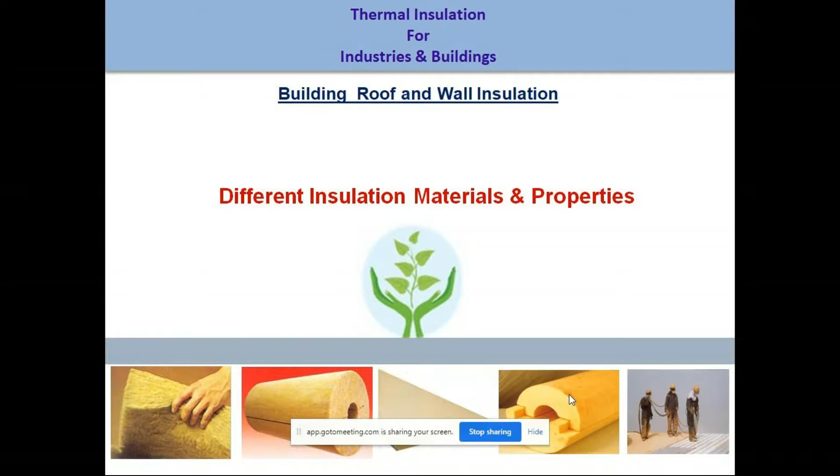There are different insulation materials, like rock wool insulation, polyurethane foam insulation, and even thermocol or EPS, expanded polystyrene. I am not covering EPS here because it is not at all a fire safe material compared to polyurethane foam or rock wool insulation. Though EPS or thermocol is much cheaper, many applicators use thermocol inside the building, but it is strongly not recommended from a fire hazard point of view. So it is always better to use a fire safe material when considering building insulation, particularly from inside the building. That is why I'm not considering EPS insulation product in this presentation.

These are some comparisons. I'm just showing you the different properties of different materials. Another important aspect is the use of the waste material of an insulation material. If the waste is hazardous for us, it will be very difficult to handle those products. So whenever we consider insulation material for a building, it should always be a safe material, for personal protection.

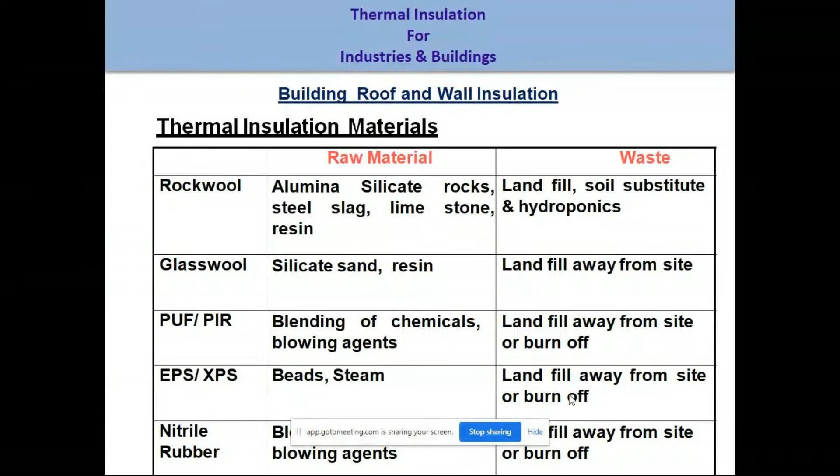Another factor comes into consideration while selecting an insulation product. There are, say, three kinds of insulation material available in the market, all equally cost-wise equal, all having good properties of thermal insulation and thermal conductivity value. Then which product should be used for a particular project to get better marks in terms of energy conservation? This is where the embodied energy concept comes in, because I have three options, three materials having equal property and equal cost, so which product should be selected? This embodied energy concept tells us that during manufacturing of those products, which product uses more energy during manufacturing. That is known as the embodied energy inside that product. So if any product uses higher energy during its manufacturing, that will get a lesser score.

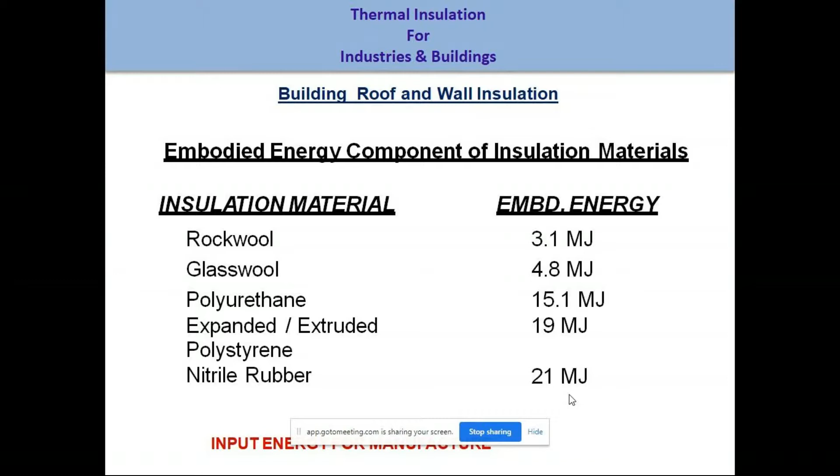You can see in this chart, rock wool's embodied energy is lesser compared to the other products: rock wool, glass wool, polyurethane foam, then expanded or extruded polystyrene, that is called thermocol, and nitrile rubber. These products are available in the market, all equally good in terms of fire hazard point of view or thermal conductivity point of view, but the embodied energy is much lesser for rock wool compared to the other products. So we always prefer to use products which have lesser embodied energy.

There are some roof insulation systems. One is called underdeck insulation, meaning when we put the insulation from the bottom of the roof, from inside the building. Another is called overdeck insulation, meaning the insulation is applied on the top of the building, on the top of the roof. These two systems are the most common applications of insulation for building roofs.

For inside applications, we always prefer to go for rock wool insulation because it is cheaper as well as the most fire safe material compared to any other product. Otherwise, PIR or polyurethane foam materials can be applied. At the same time, thermocol also can be used, and there's another product called nitrile rubber that can be used too. Compared to any other product, rock wool is the most cheap and fire safe material for underdeck insulation.

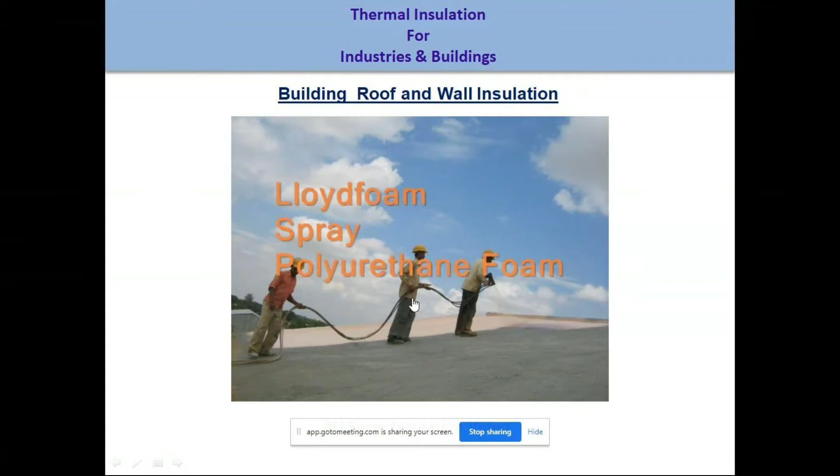For rooftop overdeck insulation, the most common and popular product is PUF spray, polyurethane foam spray applied product. There is a system called the spray applied system. Let me try to run this video, I don't know whether it will run or not. It will explain. So the PU or polyurethane foam spray system requires a machine which mixes the two components of the foam. One is polyol and another is known as isocyanate. These two chemicals come in liquid form with a certain percentage of mixing, and when they come in contact with air, they start foaming.

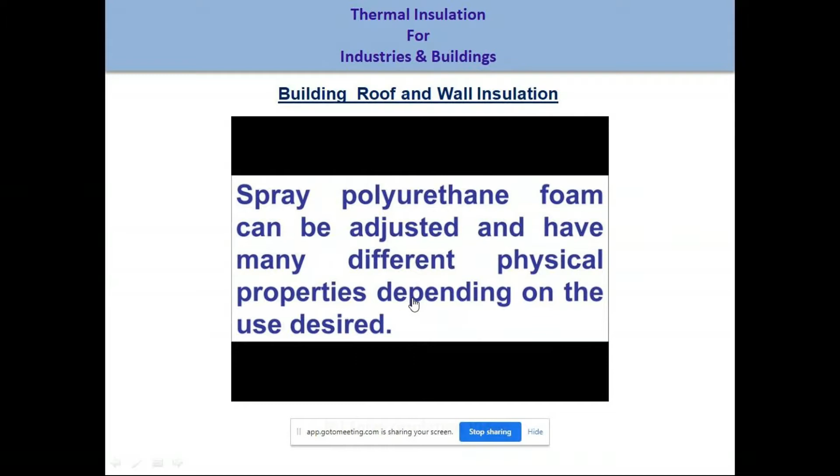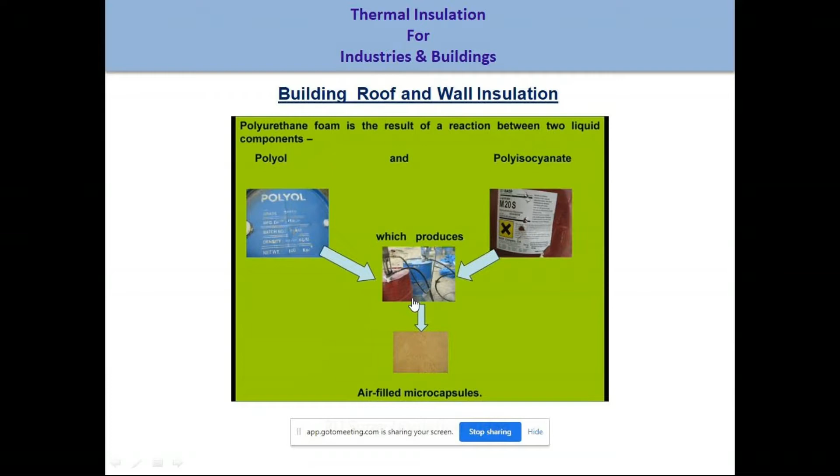It starts foaming - if I spray it, it will be like a paint sort of thing, but within a second it will come over the surface and raise the thickness of the paint to say 25mm or 30mm. So whatever the required insulation thickness is, the applicator knows how much spray is needed to achieve that thickness.

This is the spray machine. With that, these are the two chemicals - one is polyol and the other isocyanate - and there is a compressor which compresses these two liquids along with air. The compressed air and two liquids come through pipes and go up to a spray gun. These three pipes carry the liquids and compressed air to the gun, and using those three from a single nozzle at the same time...

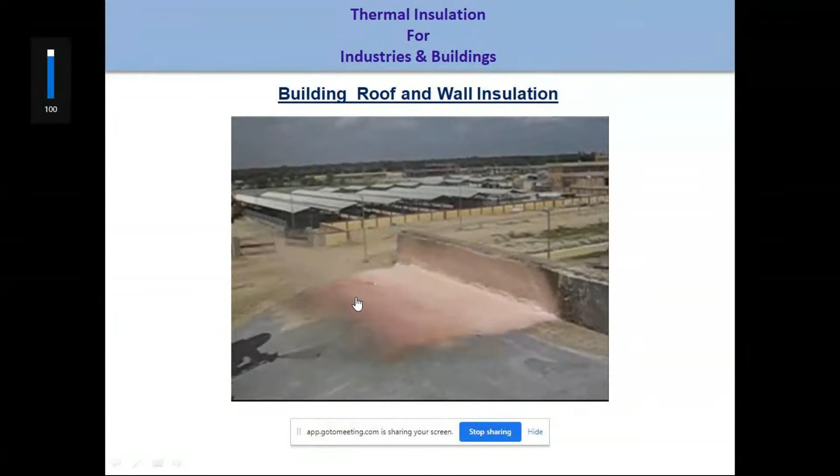Oh, sorry. So... so this was the thing.

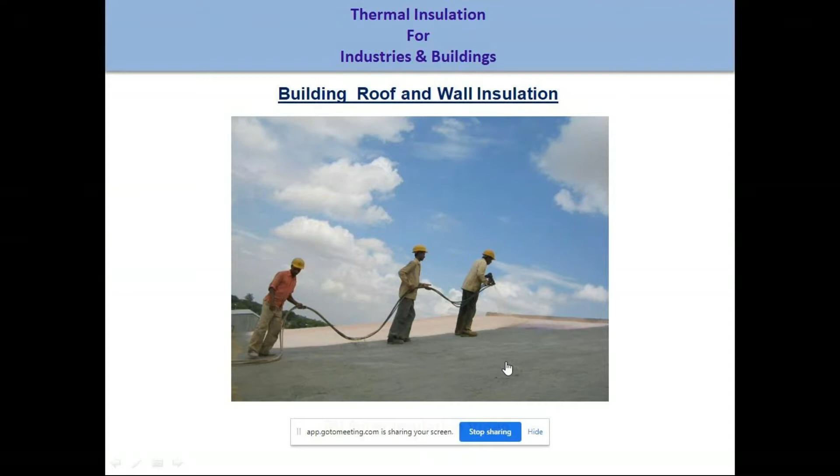This was the application of roof insulation with the PU spray system. Finally, after finishing, there will be some sort of waterproofing membrane, or there are a lot of waterproofing materials available in the market to protect the surface from water ingress. Waterproofing treatment can be done on top of that. So this is how PU spray insulation is becoming popular now for any building - commercial or residential - this is now becoming a popular system.

And then comes wall insulation as well. There are a lot of different types of wall insulation depending on the building and its requirements. The most common and popular system is the channel form system - there will be a framework, which can be GI framework or wooden framework, and in between the two surfaces there can be a brick wall, or one surface may be a gypsum board or any rigid board.

In between, there will be say 50mm to 65mm thickness, depending on the ECBC requirement. The thickness can vary depending on the location of the building. So there will be one surface, it can be brick wall, and from there inside there will be a framework, and within that frame the insulation will be put in, and that will be covered with a rigid board. This is a very common application of insulation.

Another one is known as cavity wall insulation. This cavity wall insulation has both brick wall outside and inside, and in between there will be insulation - again that can be 50mm or 60-65mm depending on the ECBC requirement. So these are the two common systems of wall insulation, and the insulation material may be polyurethane foam or rock wool insulation.

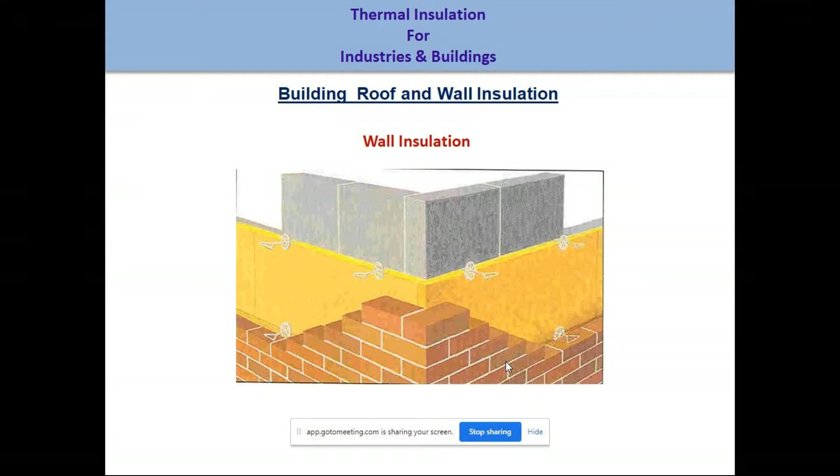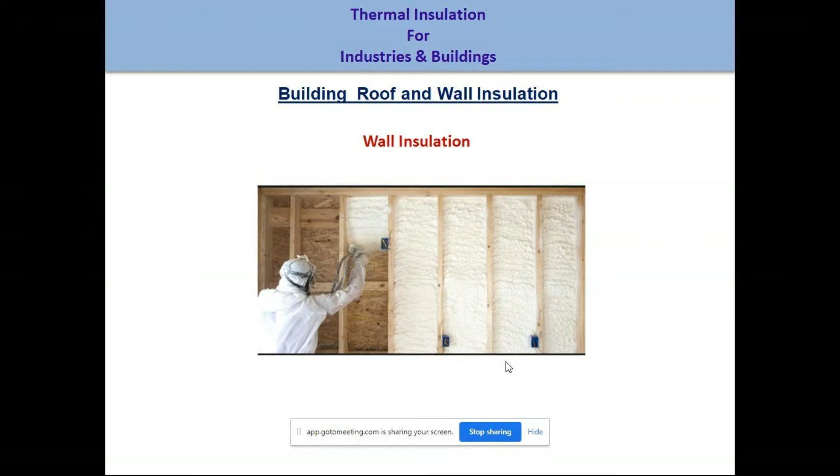And again, spray application can be done on a wall as well. As I showed this video for rooftop insulation, the same wall insulation can be done with spray polyurethane foam. So I'm just showing you this photograph of wall insulation with PU spray. There's a small video also, I'll try to show that. Just a second, if I can run this video.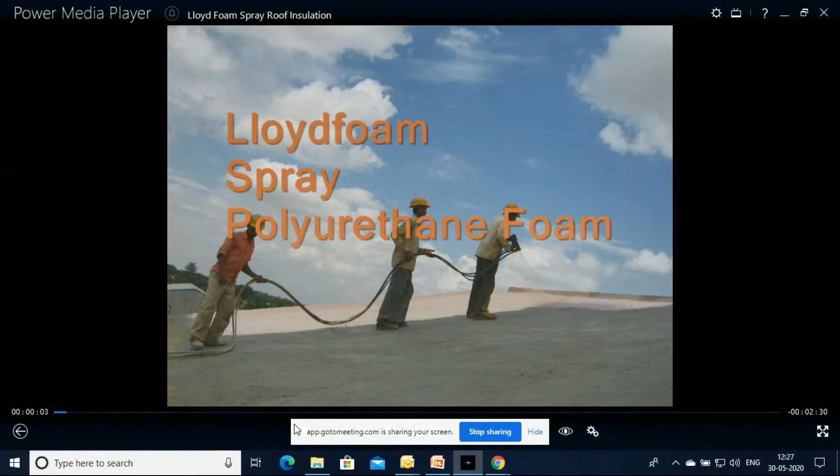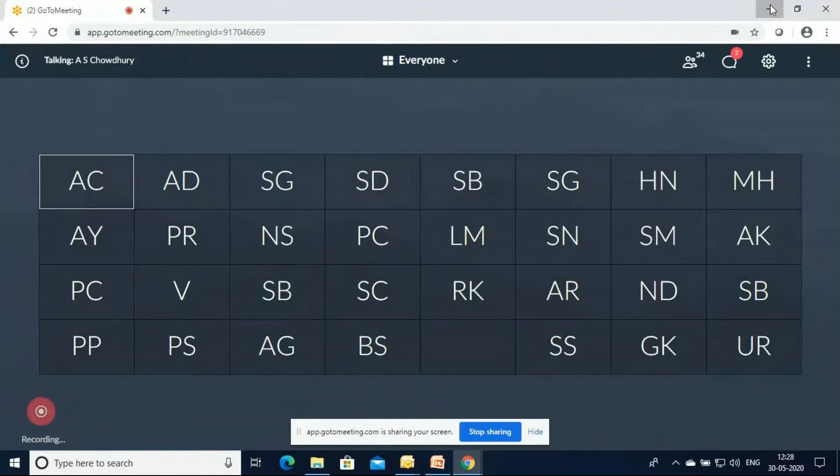Yeah. It's not running. No, this one. Just a second, I'm trying to run the video. Well Soumojit, is it visible? Yes sir, can you just remove that pop-up below, you can just hide it. Oh yes, now I got it. Okay, fine. Is it visible now? No?

Yes, it is visible. Okay, so this is the basic spray. You can see how fast it is foaming - just a small paint sort of thing, but instantly it gets foaming and covers the entire hollow space, up to the required height or thickness. This is a very common and readily available product in the market now for building insulation. If wall insulation is required, it is a very fast insulation process.

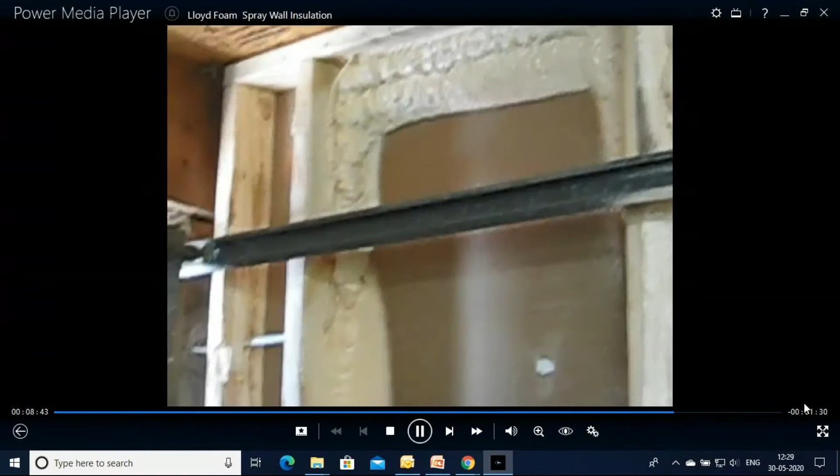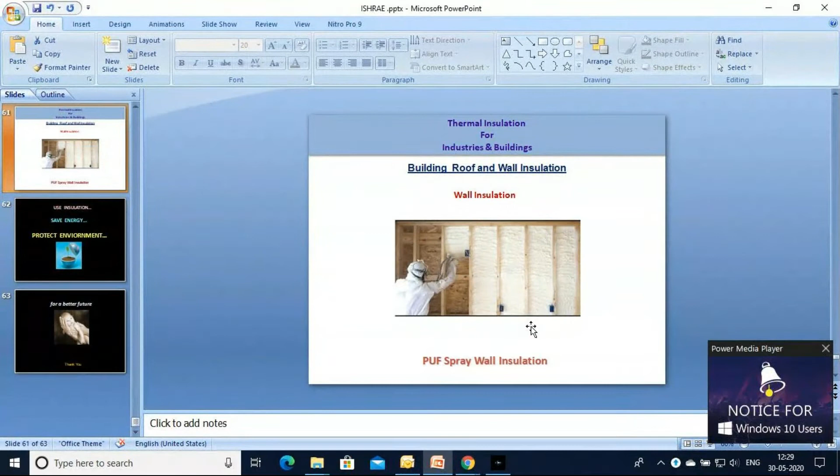So this is almost my last slide. Normally I used to finish my presentation with a slide like this: if we use energy efficient products to save our energy as well as to save our nature, to give a better future for the next generation. So thank you very much for your patient hearing, and I request Soumojit to take care.

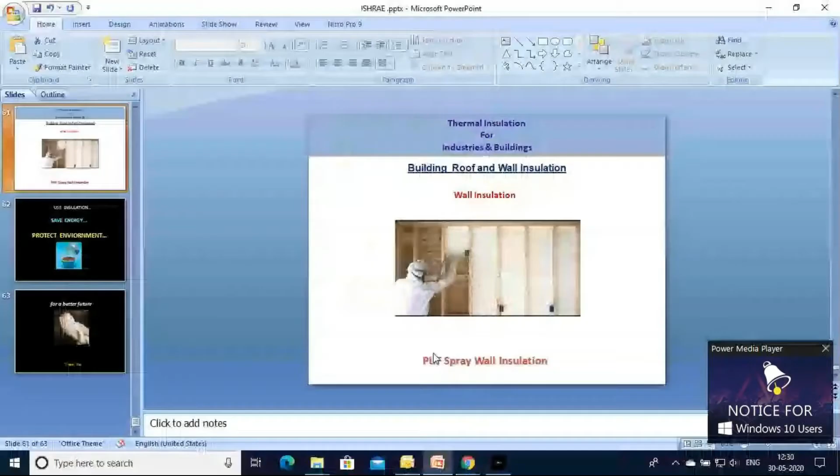Thank you, Mr. Chowdhury. I am sure, though I am into this business also earlier, so it just refreshes my memory personally. But definitely with the details which you have shared, it would be a great knowledge sharing experience and understanding for all our participants. So now I'll get into the questions part. Though your presentation was so simple and so well shared that I don't think there's any doubts as such. The questions are very less.

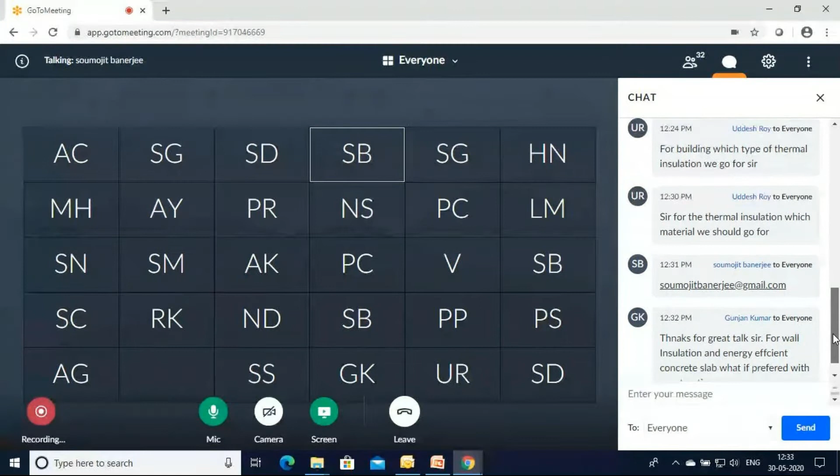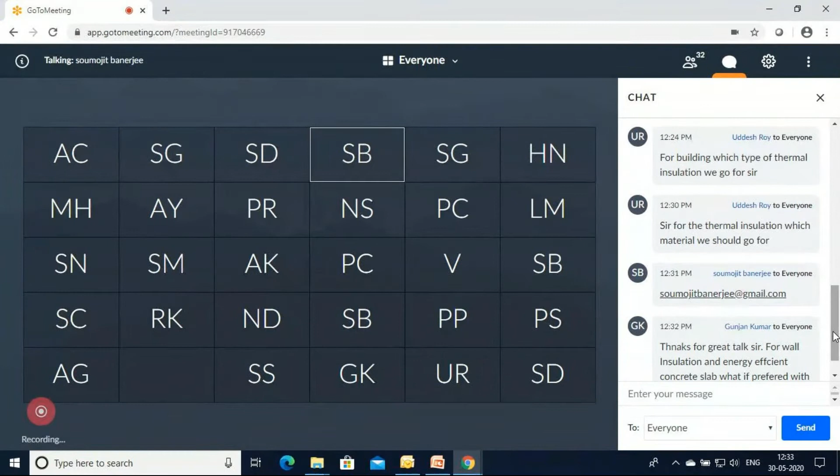Okay, now getting on to the questions. There's a question from Mr. Uddesh Roy: for building, which type of thermal insulation should we go for? It is a very vague question because under deck, over deck, wall, everything is separate. I'm sure it has been answered very prominently by you on all aspects. So maybe I would ask on his behalf, what type of insulation should be used for floor insulation if there is a requirement?

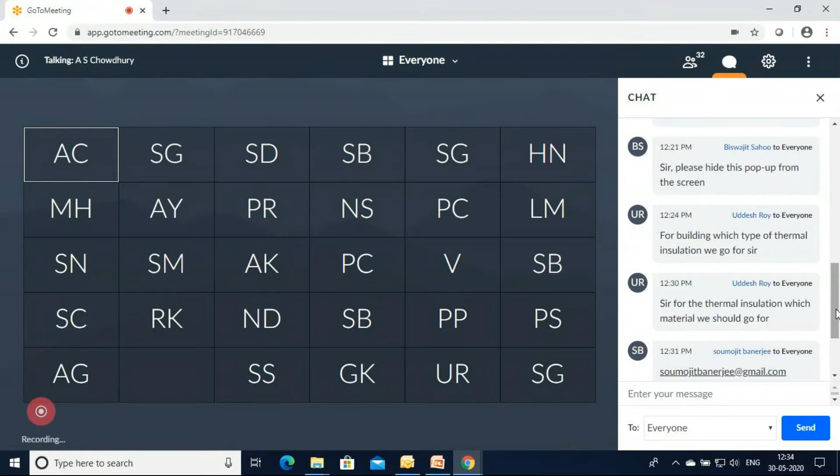Normally for a residential building or commercial buildings, floor insulation is not required. But in case of cold storages, where normally the temperature for fruit and vegetable cold storages is at plus 2 to 8 degree centigrade, floor insulation is required. For floor insulation, there is a specific specification: it has to be moisture proof as well as thermal insulation. For that, the thermal insulation material may be thermocol or EPS, expanded polystyrene. Thermocol is a very commercial term; the technical term is expanded polystyrene, EPS in short. So EPS or puff can be used with a coating of bituminous paint for floor insulation. It is mostly used for cold storage applications, not for commercial or residential buildings.

I have a question related to this, sir. Why should we use aluminum checker plate in cold storages? Does it take part of the insulation properties? Not really. Checker plates are always used wherever there will be a movement of load, whenever we carry something or use forklifts or carry loads over the floor. If we don't want to damage the floor, we need a checker plate support. It is mainly from a strength or mechanical point of view, not from a thermal insulation point of view.

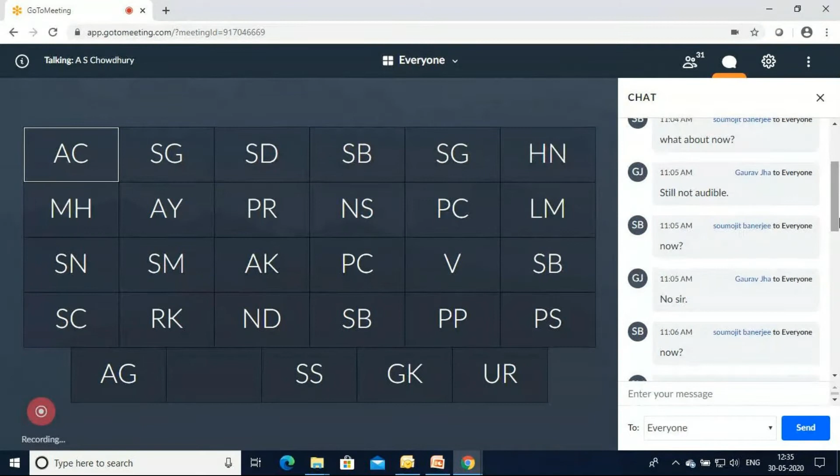I understand. There's one question from Professor Gunjan: for wall insulation and energy efficient concrete slab, which is preferred with regards to ease of construction?

There are hollow bricks or fly ash bricks coming in different shapes and sizes. There will be air pockets entrapped inside the brick whenever we use hollow bricks, and entrapped or static air has a good thermal insulation property.

In earlier days, there was a concept of roof insulation called brick bat coba. It's not that popular now, but it used a sort of porous brick placed on top of the roof to ensure there are a lot of air pockets inside, and air pockets give a good thermal barrier.

Similarly, for walls also, when you use air pockets or voids inside the brick wall, it will definitely give some sort of energy efficiency or thermal barrier.

But in present day construction, floor area is quite costly. To get more floor area, people are trying to go for thinner walls instead of thicker ones. These hollow bricks have comparatively higher thickness compared to the conventional wall thickness with insulation.

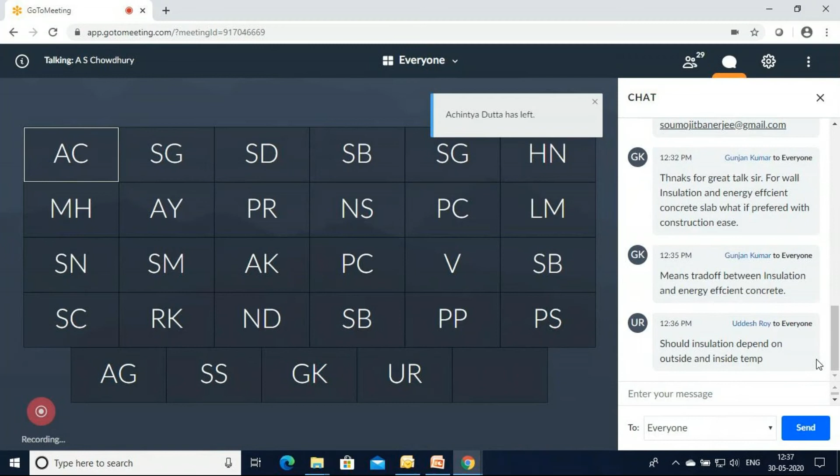These prefabricated insulated panels were mainly developed due to cold storage applications, but now a lot of applications are coming up in the building sectors.

Even in Calcutta, coming from Salt Lake to Rajarhat, bang opposite the DLF building, there is a building called Restelo, constructed by Sachi Group. The entire building has no brick wall - it is constructed only with puff panels, insulated panels. This is a G+4 residential building.

So these concepts are coming into the picture of using insulated panel walls. There will be no brick wall required. This is the new trend, particularly for cold storage applications - all new cold storage is coming with pre-insulated puff panels, and no brick wall insulation is required.

I just wanted to share one more thing - cold storage has got a lot of space also, so there is no challenge on the insulation part, unlike air conditioning insulation where hardly there is any space.

There's a question from Mr. Karthik: could you please throw some light on aero bricks or aerogel filled bricks? Are they safe for usage in residential and commercial applications with occupancy?

Yes, I should mention one insulation last, that is called microporous insulation. Aerogel is a process of microporous insulation manufacturing - aerogel is a technique, aerogel is not the product. Microporous is the product, and aerogel is the process, more popularly known as sol gel technology. That process makes this microporous insulation. But it's not so much popular till date because, as I said, abnormally high cost is there.